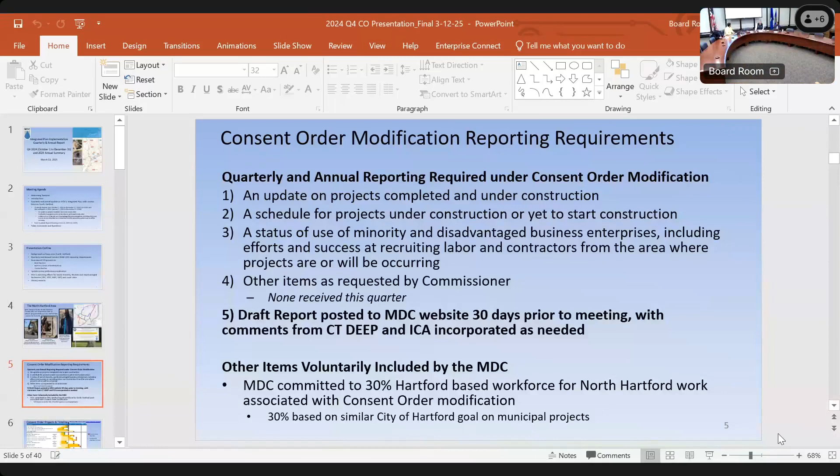This is Ann from DEEP. Are we supposed to be able to see your slides? Oh yes, you are. We're not. Thanks, Ann. Do you see it now, Ann? Yep, okay, thanks. This isn't working.

All right, for those who did not get to see the slide, the pictures of the example work are shown on the slide, as well as the map showing the footprint that represents North Hartford.

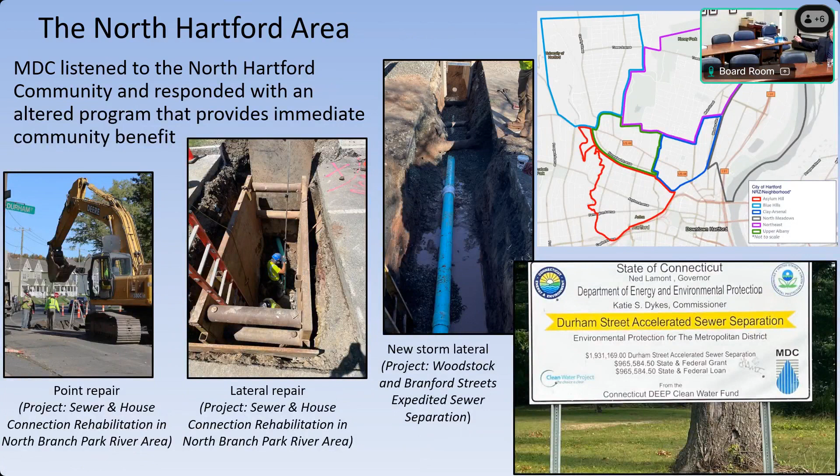And now we're moving ahead to the slide I was on. This is the required presentation material per our consent order. There are no items that were requested from DEEP's commissioner, so there's no changes to this slide from any prior presentation.

The slide shows status updates for all the work included in our consent order. There are now 4 new projects that are completed: the Tower Avenue area project, the Woodstock Branford private property work, the N30 CSO project, and the current CIP in the Gully Brook area project.

You'll see also on the slide that the Windsor Street project has been separated into 3 phases. That is being done to best expedite work in this area so we can get a shovel on the ground faster and do the best we can to meet the milestones that we have for this project area. The first phase, the sewer rehab phase, will be going into construction early in 2025.

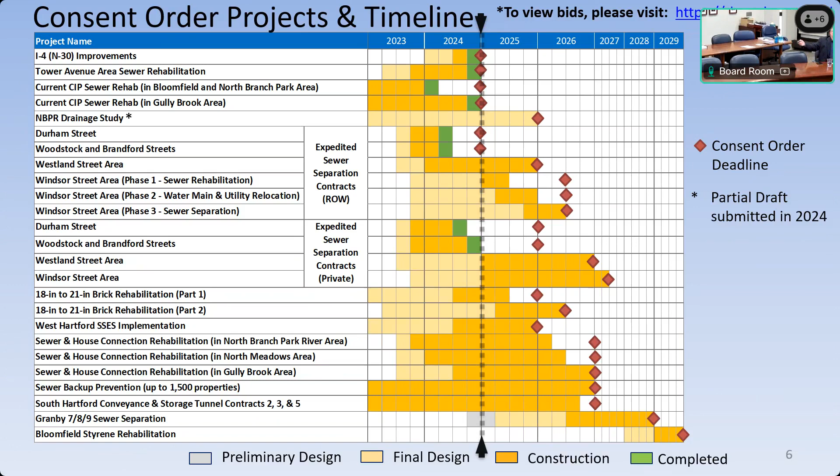This slide shows some example photos from 2024, including the flyer that we made for the Durham Street separation project. We highlighted that project as it was the first expedited sewer separation project completed as part of the North Hartford pilot program, completed well over a year ahead of schedule.

Some example photos on the left of some private property work, whether it be a house connection repair, sewer lateral repair in the middle, or on the right, a new storm lateral that was installed on the Woodstock Branford project.

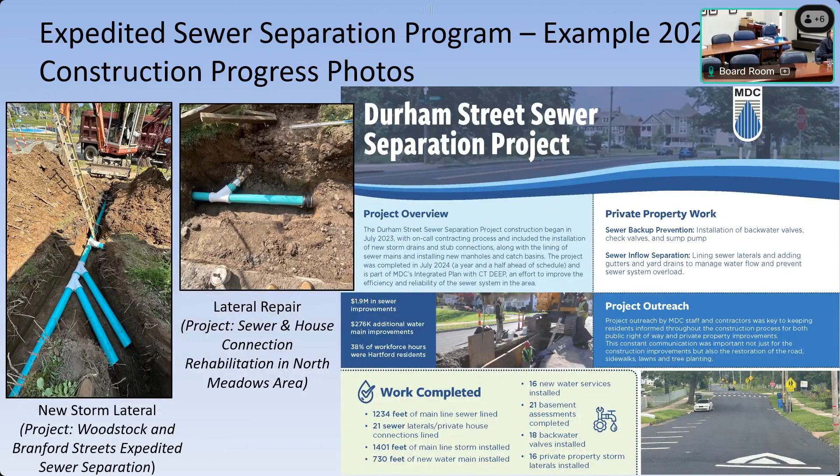More example work photos. The 2 photos on the left are a before and after of a house on the Woodstock Branford project area. You'll see the upper of the 2 photos shows the roof leader going into the house under that old cast iron connection that most houses had, while the photo below that shows that same roof leader now going into the new pipe on the ground.

There's also a new pipe going to the ground to the right of that window, the basement window. That's a sump pump discharge. So the interior separation work was done as part of this project as well.

Now, while not quite the same house, you'll see the picture on the right shows 3 different connections, similar style to what was done in the house on the left, where it'd be 2 roof leaders and a sump pump discharge all going into one common storm lateral that would then go out to the new storm drain in the street.

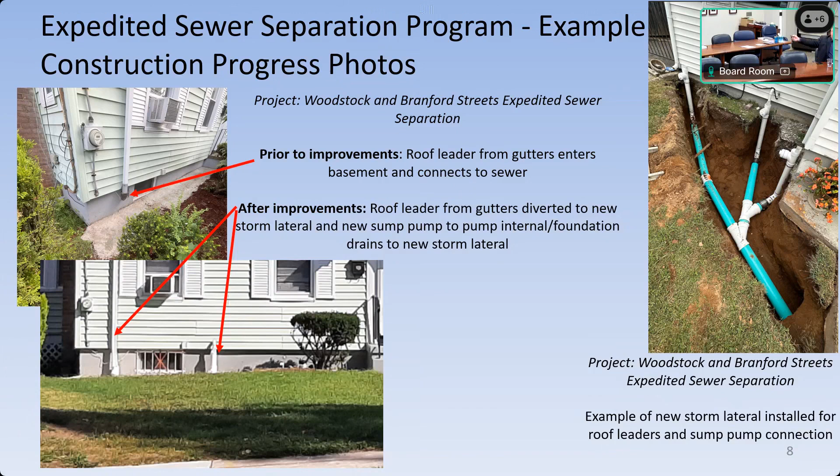Moving along, work outside of our consent order, which we're also required to present. The main accomplishments in 2024 were sewer rehab work and our on-call sewer program.

This is outside of the contracts in North Hartford. We did about 5 miles of lining, sewer main lining, in those projects. There was also some sewer lateral rehab included as well. Most of that work is in conjunction with our member towns' paving programs.

In addition, the work for the easement program was nearly complete at the end of 2024. That's why it says in progress in Newington, and then we're moving into Wethersfield, followed by West Hartford and Hartford in the next 3 years. The other project listed on the screen, the Bloomfield Sewer Rehab Project, is in design through the end of 2024 and expected to go into construction in late 2025.

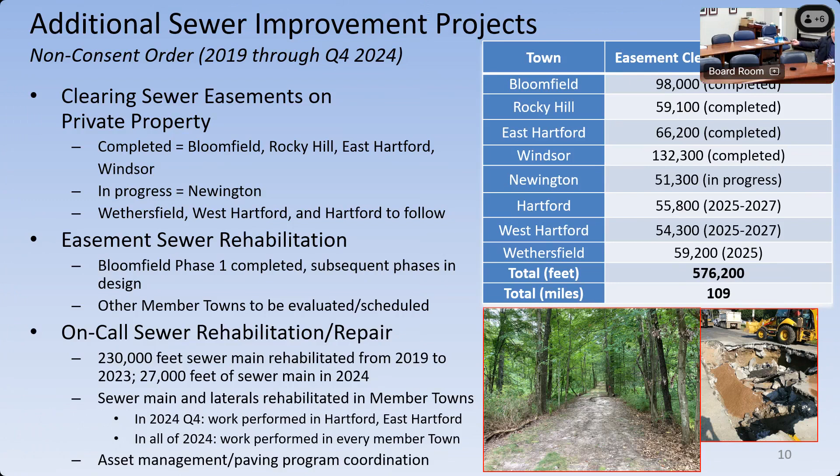This is a new slide that we added, just kind of painting a picture of where we're touching in North Hartford. As you can see, with the neighborhood NRZs in North Hartford highlighted, we're pretty much touching every single area with work going on. Work in green is completed, work in that bronze orange is in construction, the lighter color is in design, and preliminary design is the gray color behind that.

Over time, pretty much everything will move into the green phase as these projects get completed. But we wanted to add this to just kind of geographically point out, hey, these are all the different neighborhoods that we're doing work in right now.

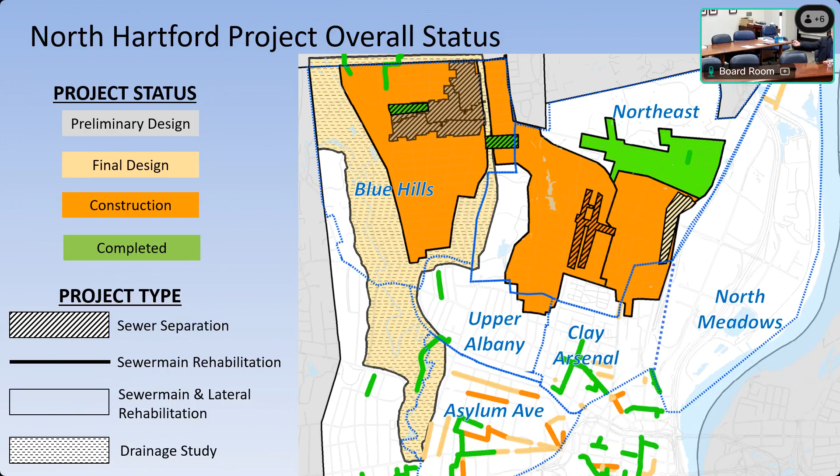Now I'm going to toggle through this slide as projects are going to highlight and pop up. Just before I toggle through, Tower Avenue is really the only one that changed on this slide, as that was the one that was completed in Q4. All the other statuses stayed the same.

So you've got the expedited sewer separation contracts. They are going on right now, with Durham being complete, Woodstock Branford being complete. Westland Street is currently in construction, and Windsor Street area, which I mentioned earlier, is being broken up into multiple phases and will start construction soon in 2025.

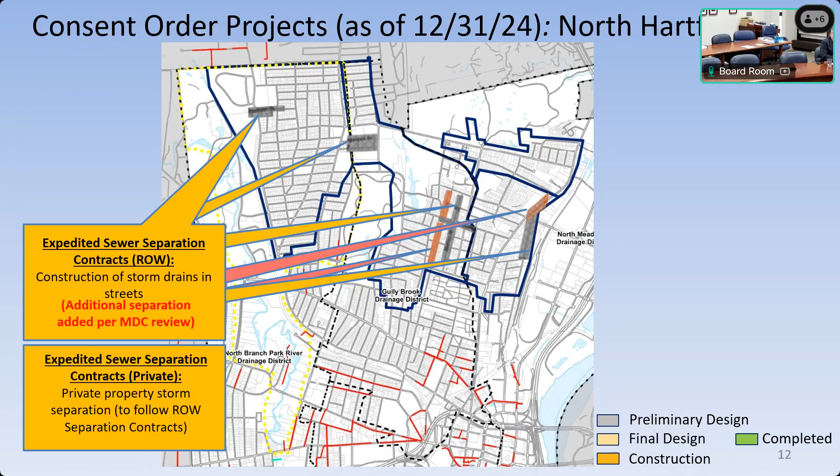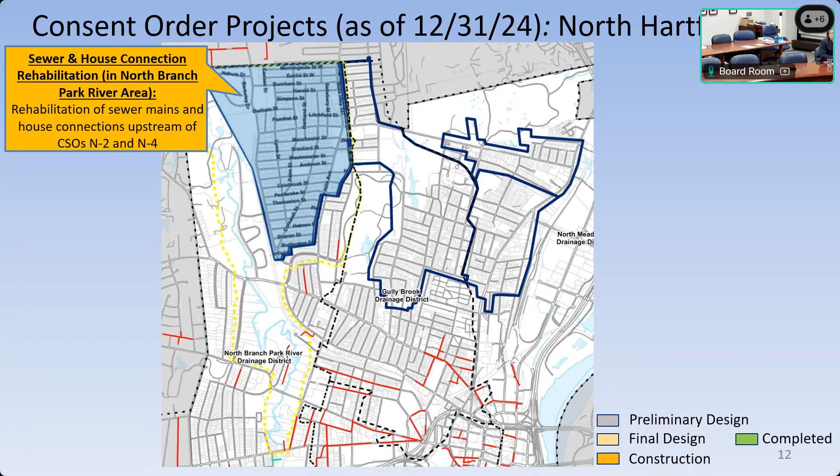The next one is the Tower Avenue project area, which was completed in 2024, followed by the 3 large lining contracts, with the North Branch project being the first one to go into construction, then the North Meadows construction project, and the Gully Brook area project. All 3 of these will be in construction into 2026 and will represent a large chunk of sewer rehab work and sewer lateral work in these 3 sewer sheds.

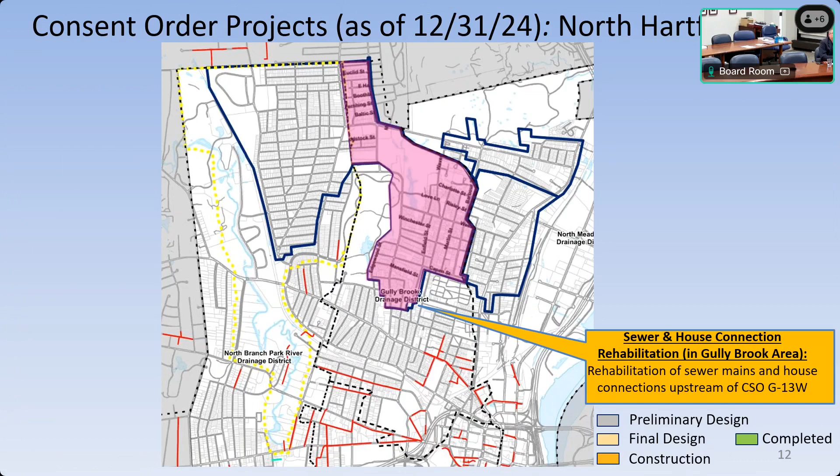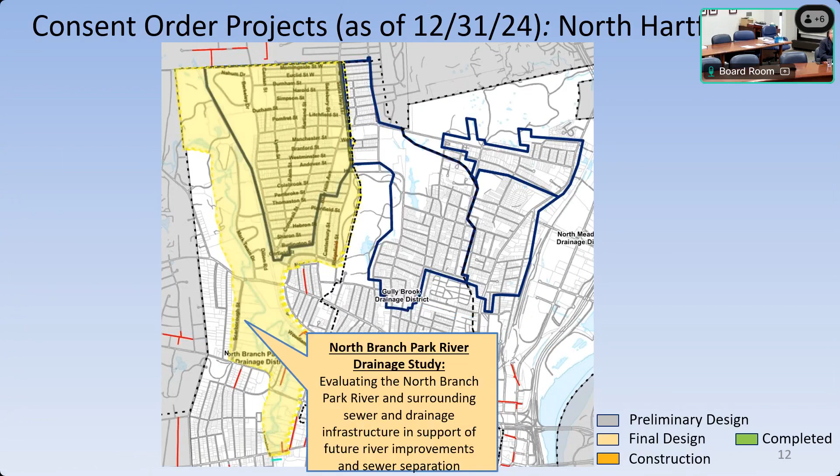The last one to show up here is the North Branch Park River drainage study. I have another slide that's going to cover that, but the yellow highlighted area here is the footprint of what that drainage study encompasses from a land area. And then finally, the Granby 7/8/9 sewer separation work, which is still in the planning preliminary design phase. The preliminary design has started, and once that PD is done, which I'll go into more detail on in another slide, the final design for these 3 areas will go into start mode.

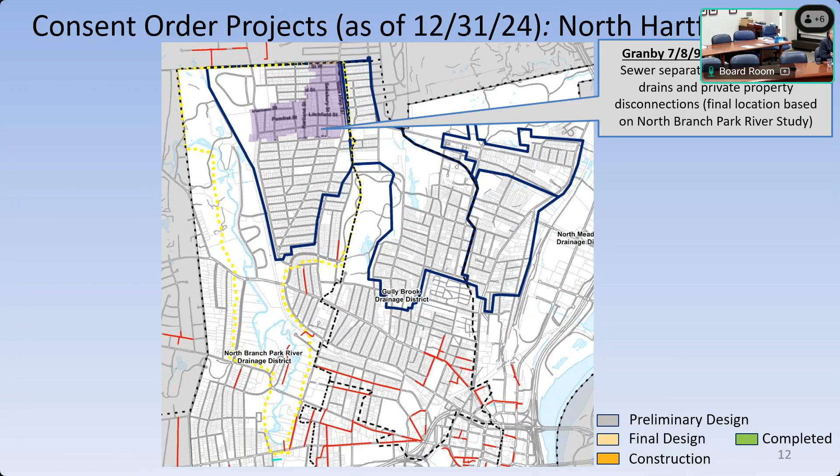Moving along, this slide is a repeat from prior presentations. The main purpose of this slide is to educate homeowners or property owners as to how to participate in either our sewer backup prevention program, also known as the backwater valve program, or the sewer house connection program. There's no cost to these property owners to participate, and no cost to have the improvements made.

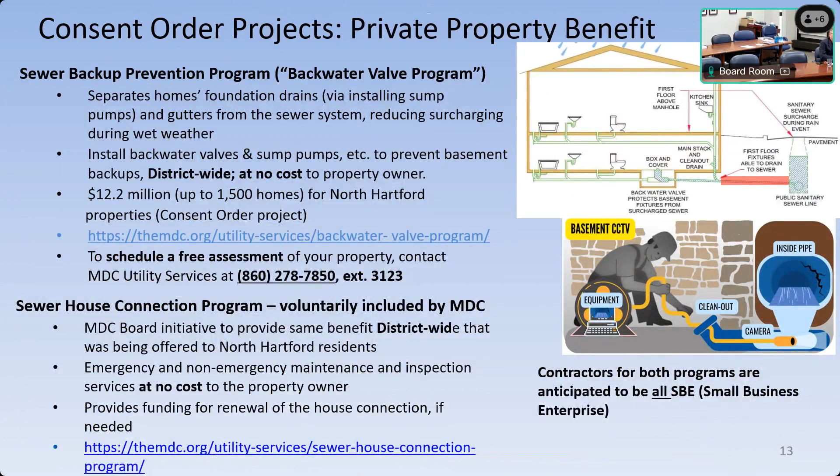Now, the sewer backup program—there's no typical house when we do this work. Every house is pretty much a miniature project that our utility services staff kind of get to solve and get work executed. But these 2 pictures show a before and after of a particular property with what improvements were made as part of this program. The bottom line is, after the program's complete, the house was protected from backups. There is no possible way that it could be backed up, whether it be from groundwater through its foundation drain or the sewer backing up.

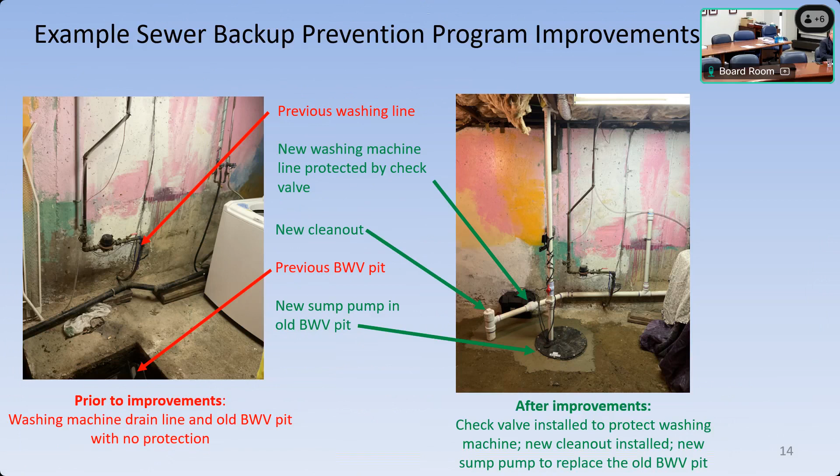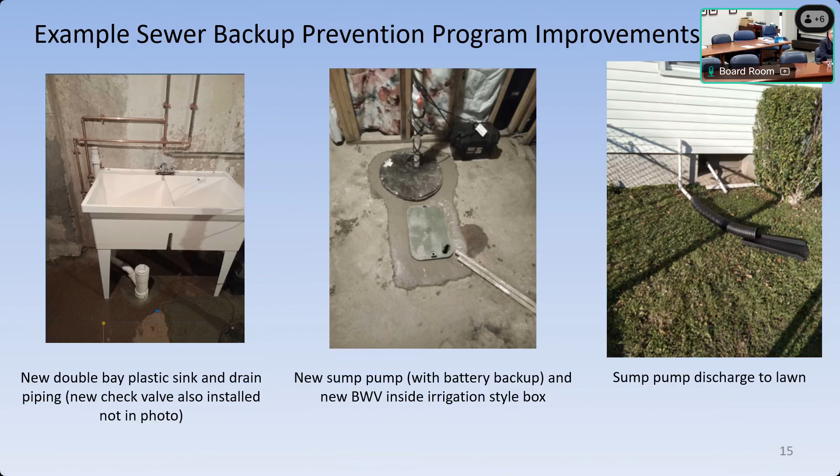More example photos to accomplish those 2 goals of protecting those properties. You've got a new sink with backup prevention, and a sump pump in the middle, which would be used to pump out the foundation drain water that would have gone to the sewer lateral. On the right, if a house doesn't have the option of having a storm lateral there yet—as in, the sewer separation work hasn't proceeded in that area yet—the alternative or temporary solution is to have the sump pump discharge to the lawn, like it's shown on the picture.

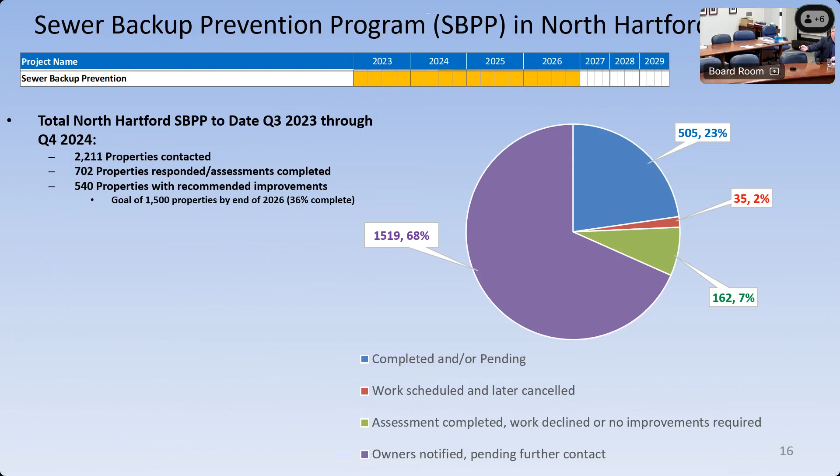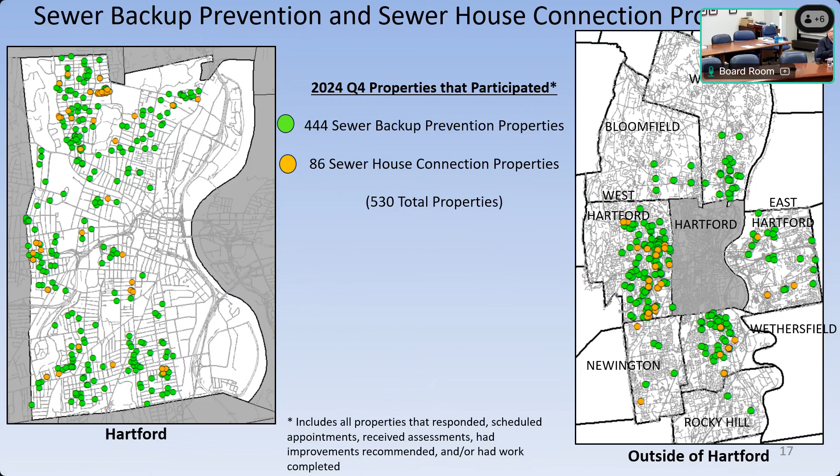The next slide is a similar theme, except showing all of 2024. As you can see, nearly 1,700 properties participated in these two programs district-wide. For comparison, the 1,500 number I gave on the other slide was specific to North Hartford.

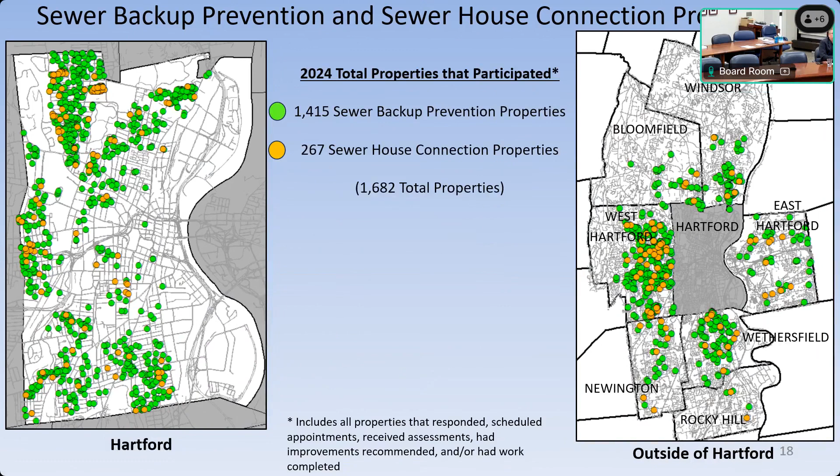Now moving ahead to consent order projects outside of North Hartford, but still in Hartford. We now have 2 green projects on this slide - green projects completed. That being the current CIP work in Gully and Bloomfield as green, and I toggle to it, the N30 project should show up. That project's now also green as being complete.

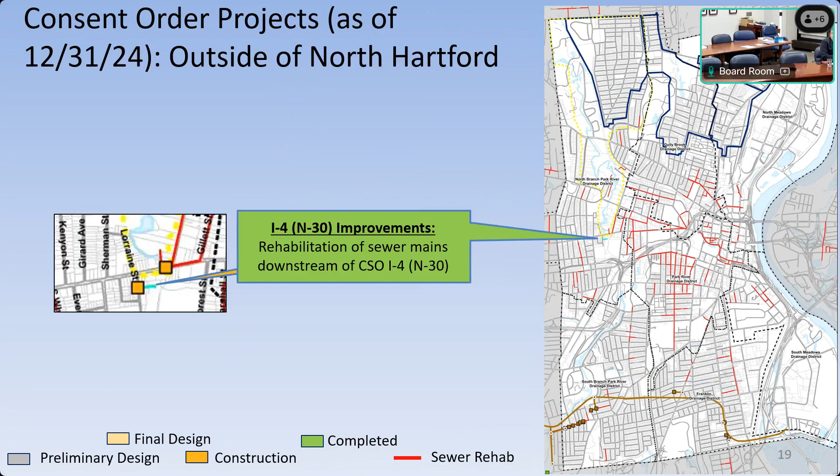Now going back, the 18-inch to 21-inch project, as you may remember, was split into 2 parts. One part is in construction. The second part will go into construction later in 2025. Now, with the completion of the N30 project, that is now the first CSO that has consent order compliance that has achieved a 1-year level of control.

Moving ahead to projects outside of Hartford, no changes on this slide for any statuses. West Hartford SSES continues in construction. As I mentioned in the prior presentation, it's a large project - about 100,000 feet of sewer lining and 2,200 laterals. The main line lining will be done by the end of 2025, which is the consent order goal. The sewer lateral lining will continue into 2027.

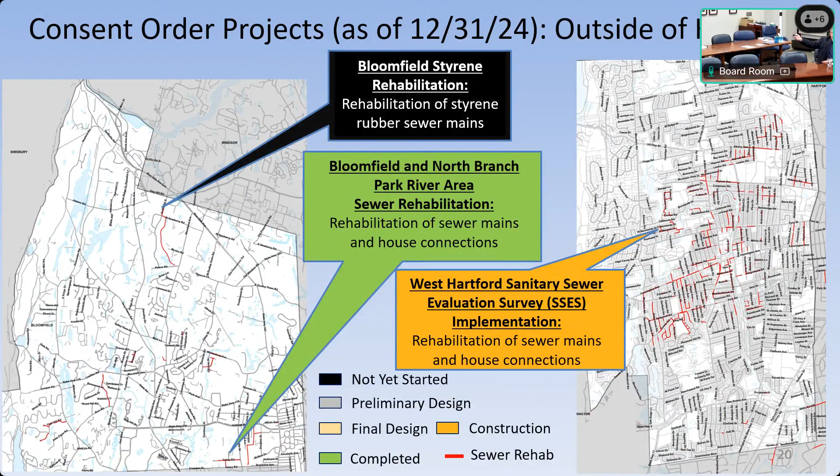North Branch drainage area study - no changes to this slide compared to Q3. However, early in Q1 of 2025, the city did complete its review of the report that CDM Smith did on the river and the drainage system connected to the river. The comments were sent back to CDM Smith, and CDM Smith is working on addressing those comments.

Parallel to that, CDM Smith is working on the separation designs for all of the Granby area, not just 7, 8, 9 - however, the focus is 7, 8, 9. We expect a draft of that study to be completed by the end of Q1 or early Q2 of 2025. Once that's completed, we can then start the final design phase for the separation work in the Granby area.

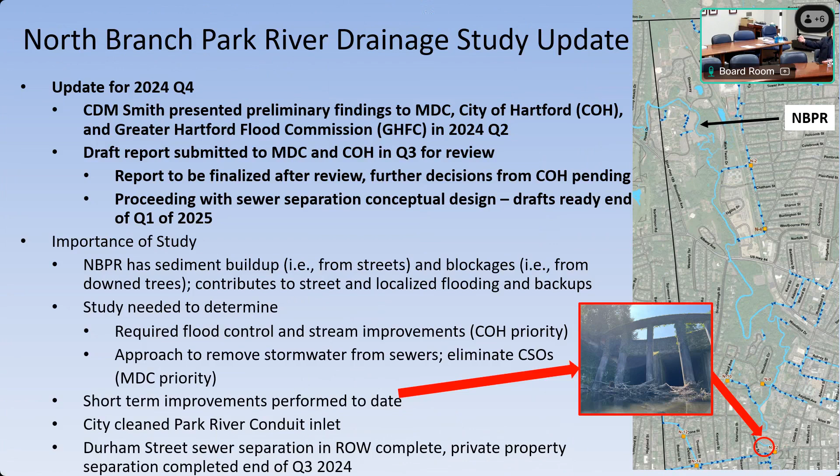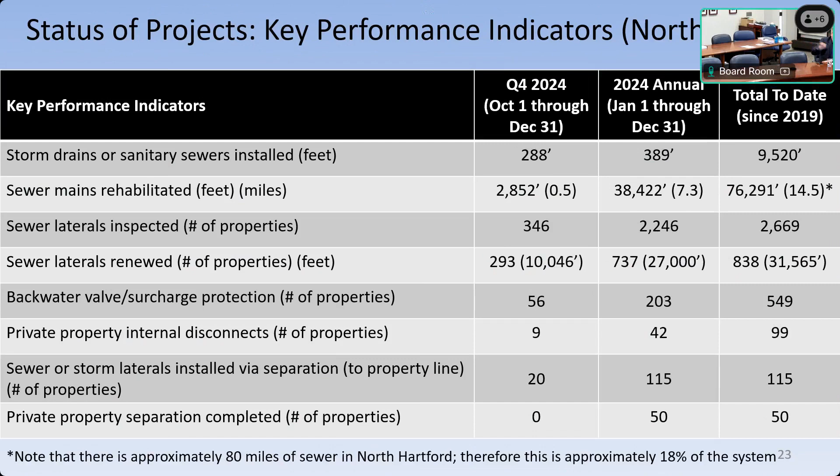Now looking at North Hartford, similar items increased Q4 to Q3. But it's worth noting that the mainline rehab work in North Hartford is 46% of the mainline rehab work we did within the year of 2024 district-wide, and the lateral work's like 33%. So obviously the focus on North Hartford is coming through in the statistics that we're reporting on.

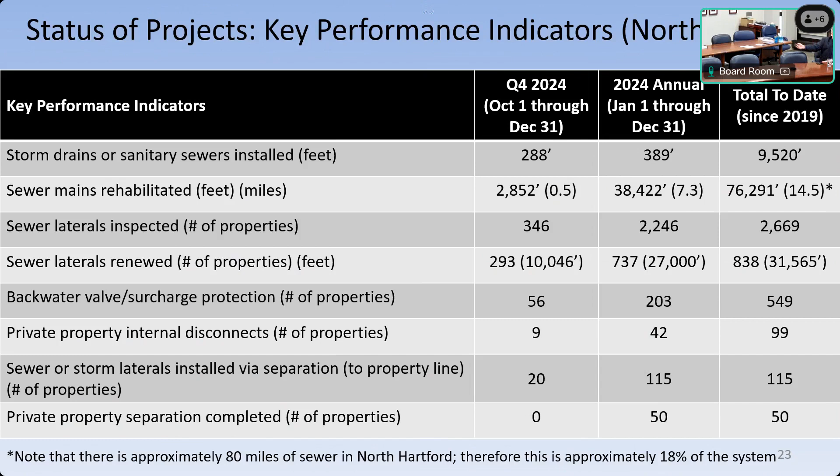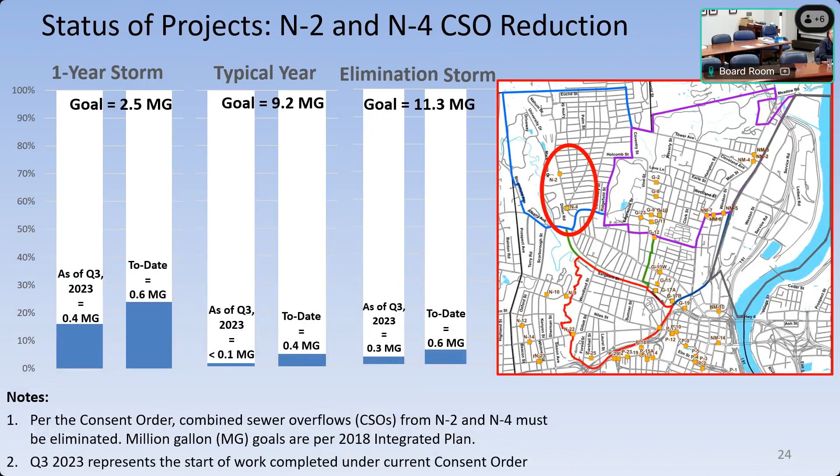This is CSO reductions in N2 and N4, which we're required to report on. No changes in this slide, as none of the work that we did or completed in 2024 are subject to these two CSOs. It's really going to be the North Branch Park River area and then the separation work that will complete these objectives.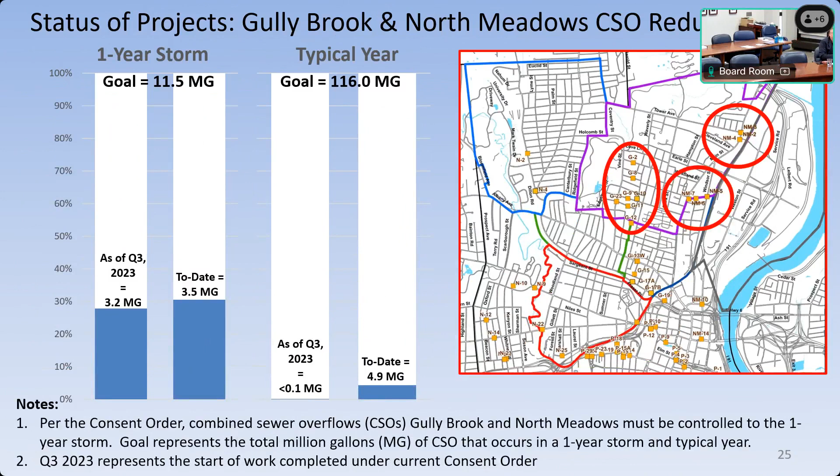And then in similar fashion, as we look at Gully and North Meadows, only the Tower Avenue project, the top right of the three circles on the map, had an impact on this screen with the CSO reductions achieved from that project. The other projects that I listed as complete aren't tributary to these two drainage areas, so they wouldn't show up on this graph.

And with that, I will pass it over to Jeff. Thank you, Jason. So with this part of the presentation, our goal is basically to review all the things you've heard in Q1 through Q3 and set a clear path as far as what we're doing to continue to move forward as it relates to outreach and workforce development. So the community continues to be a valuable resource, and we are connecting with the neighborhood we serve through...

Appreciating everyone's participation and cooperation through this critical period of the North Hartford Pilot Project, we're maintaining strong community engagement throughout the House Connection Program and the Backwater Valve Program by providing comprehensive outreach. We're doing that through mailings, door-to-door notifications, project meetings, active participation in the local NRZs, and attending community group meetings to ensure that residents stay informed.

For real-time updates, you can visit our website or visit us at our outreach office at 179 Barber Street. This location serves as a central hub. You can visit Monday through Friday at those various hours, and that's a place where the public can get information on project schedules, career opportunities, contractor resources, and those interested in MDC job openings can connect with myself or Carlos Bravo. We're overseeing the contractor career development and construction compliance.

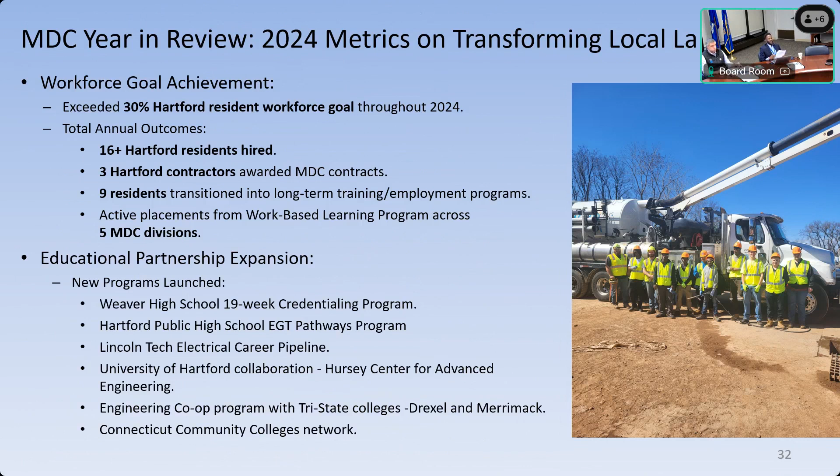Some notable things we've accomplished in 2024: we're part of the New England Water Environment Association, where we wrote an abstract on our workforce development success. We also presented at the Institute of Asset Management, talking about workforce development as an asset that companies should start taking a look at. It's not just about equipment, staff, and computers being assets—people are assets too.

Personally, I was part of the Transformative Water Leadership Academy, where I did a capstone project on the success we had with these workforce development initiatives. We also landed strategic partnerships with Pratt & Whitney, Ready CT, and Blue Hills Civic, where we're working inside high schools to develop training opportunities and really be a bridge for students getting from high school to the MDC or to some of our contractors.

Looking ahead in 2025, we're excited to see what we could do as far as in-house apprenticeship programs, teaming up with the CTEC high schools to look at one of the jobs we have a high need for, which is the instrumentation and control tech specialist.

We now have our annual trade program, where we're at, I want to say, at least 13 high schools in the Hartford area. We have about 52 applicants, and out of those we'll probably select 15 students and keep in contact with all of them to see if we can mentor them and provide additional opportunities.

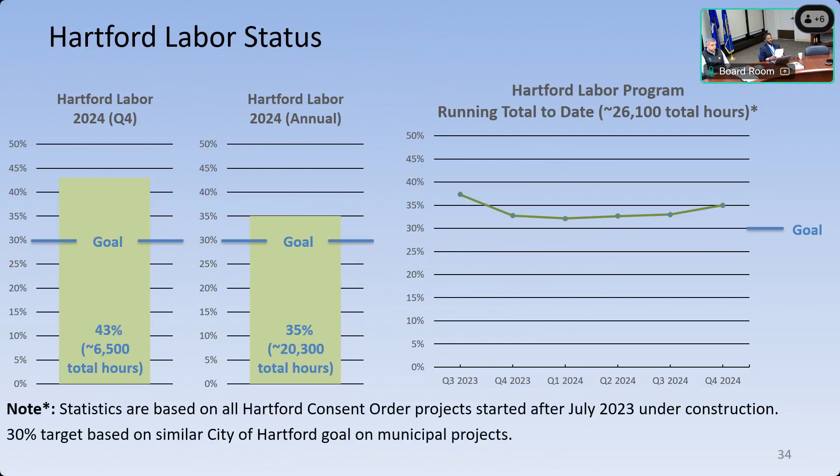As far as our Hartford resident goal, which everyone's very excited about, this quarter we were able to employ enough Hartford residents to total about 6,500 hours. That was a grand total of 43% against our 30% goal. To date, we're at 35% of all hours worked on Hartford projects being by Hartford residents, for a total of 20,300 hours.

As far as our MBE and WBE goals, we are exceeding our minority business goal on a dollar percentage basis by 1.5%. We're doing a very good job on our women business enterprise goal this quarter, exceeding it by 8%. Overall, we're exceeding our 4% goal by almost 0.5%. So overall, I think we're doing a pretty great job with our WBE goals and our overall workforce development.

Thank you, Jason. Thank you, Jeff. Thank you, Jason.

This presentation shows there's a lot of great work being performed by MDC, all of our support staff, and our commissioners are very supportive of all the work we're performing. The community involvement on all these projects is greatly appreciated, and there's a lot more good things happening throughout the program. Just a reminder, stay informed.

Jason and Jeff mentioned we do have a portion of our website dedicated to our Clean Water Project and our integrated plan. The web address is part of this presentation. If any residents or anyone from the public want to learn more, we present at our NRZ meetings, the City of Hartford NRZ meetings. The next quarterly meeting is coming up this June. More will come—the presentation will be posted prior to the meeting.